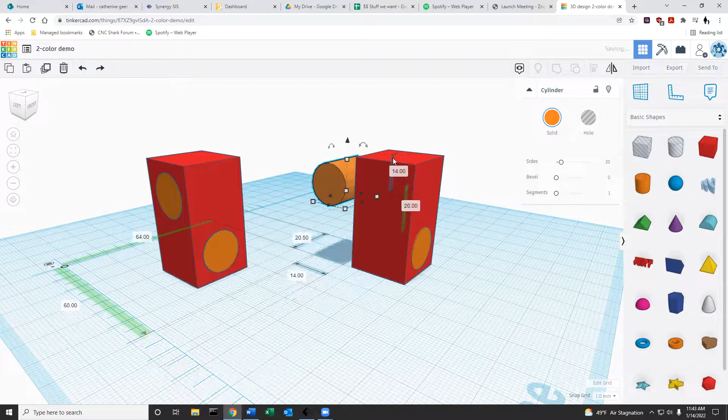So if I look at this shape here on the right, and I grab one of these orange cylinders and move it aside, we can see that this red block, in fact, is solid. And so when I put them back together, really all you're seeing is a little bit of orange, tiny amount that's sticking outside of the block. So right now, there's two solids overlapping. That doesn't really work in the real world, right?

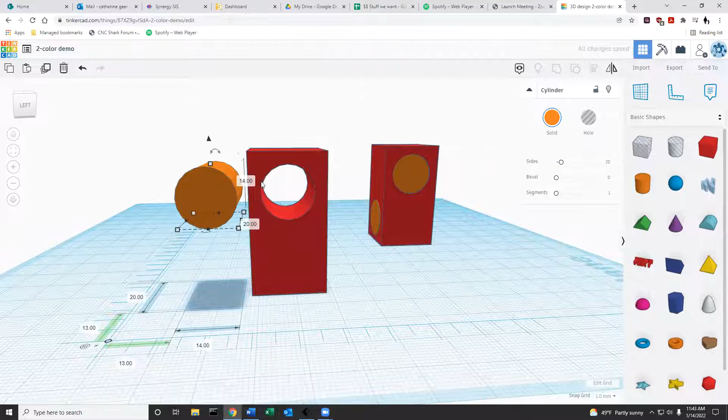On the other hand, this one on the left, if I take this orange cylinder and move it aside, you can see that in fact, it's just sitting exactly inside the hole in the red block. So if I were to envision this in the real world, it would be more like these cylinders are put into these holes in the red block, right? They're filling in spaces that are otherwise empty, whereas this one, we have overlapping solids.

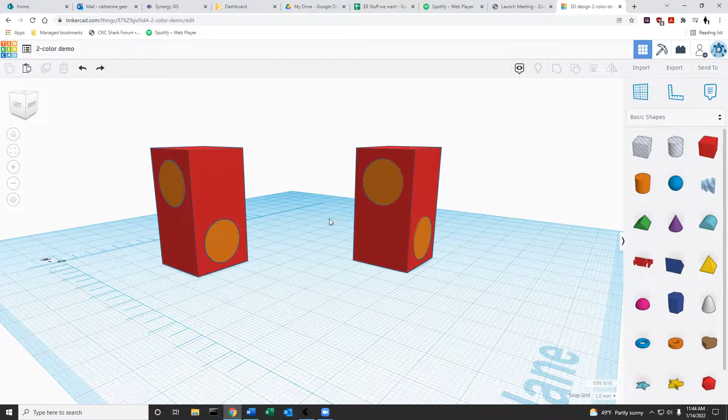So this is important because this one on the left, your 3D printer will know what to do with. This one on the right, how do you put a solid inside a solid? That's not really going to work out. So we're going to focus on this one on the left.

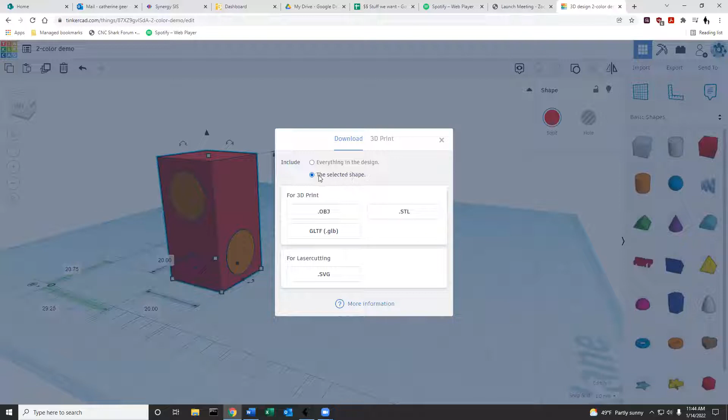And so here's what we do. I have them color coded already. So maybe I will have the red block first. And you can see that I only chose the red block, not the orange cylinders, right? So just the red block. Now I go to export. And you see this option, it says, I only want to export the selected shape. So instead of the whole design, I'm going to take just the selected shape, and then I'll choose STL, and it will do a download.

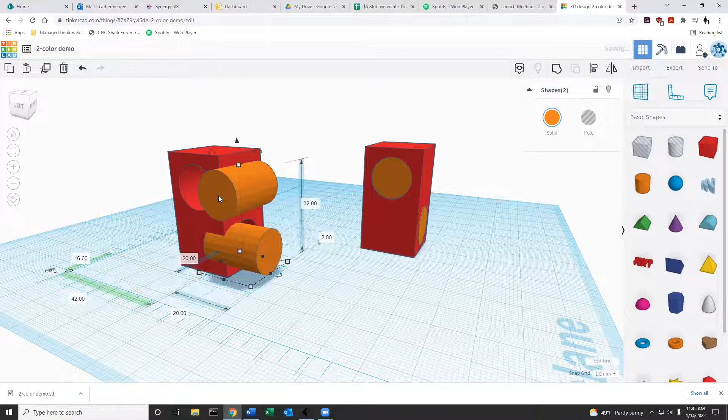Okay, so there's one. And then for the second, I'm going to choose this cylinder, hold down Shift, and choose this cylinder. And so now if I move them around, you can see I have those two together. And now when I hit export, it says I can either take everything in the design or only the selected two shapes. Well, I only want those two shapes. So now I'm going to click STL and we'll get another download.

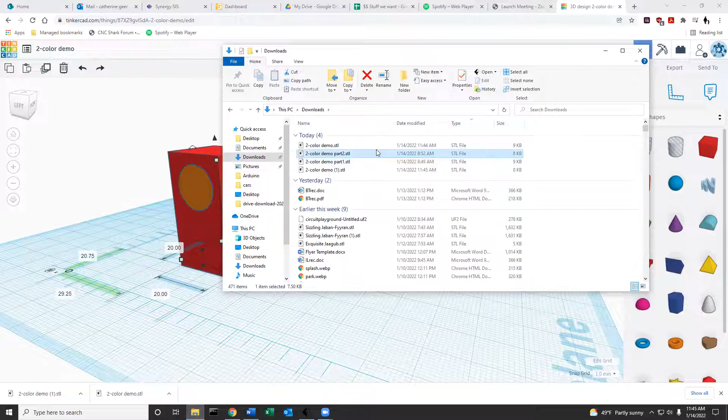So I did this earlier and renamed them so they'll be easier to see, but here they are in my downloads. So two color demo part 1, two color demo part 2. So those are my two different pieces. Okay. So now I'm going to go to FlashPrint. So this is our software for getting our prints ready. I've already set it up for the Creator Pro #1 by choosing the machine down here in the corner. So if you have something else, you could choose a different machine.

And now one important thing for two color printing is we need to go to File and Preferences. And here where it says auto layout newly imported model, I want to say no. By default, this will be on yes. And what that does is it will drop the object onto the platform and try and line it up with whatever else is there, or lay it out so that they can print separately.

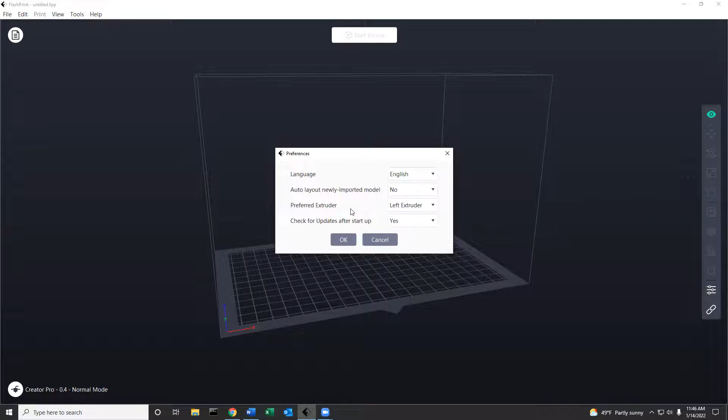And while a lot of times that's really handy, we want to kind of overlap our shapes and make them fit inside one another. So we do not want them to auto layout. I'm going to say okay. And now I'm going to go to the model section up here and bring in new models. So I'll bring in part 1 first and say open. And so here's part 1.

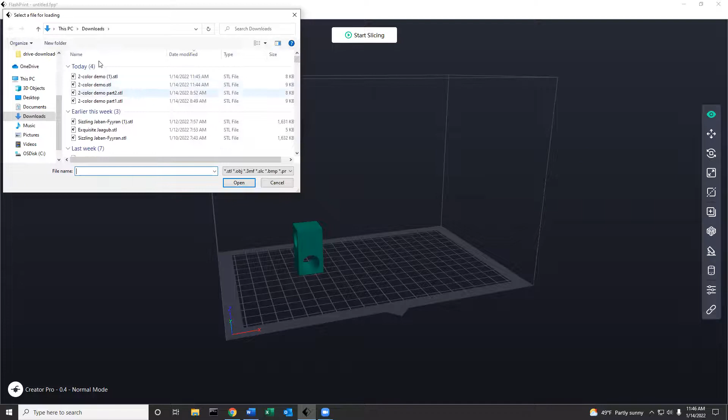And I could, for example, center that. Well, maybe not yet. And now I'm going to bring in the other one. Here's part 2. And I'm going to say open. And so it's going to give us this warning: the model is off the platform, do you want to put it on the platform? So if I said yes, it would drop to the platform and no longer be aligned with my shape. Okay, so I'm going to say no.

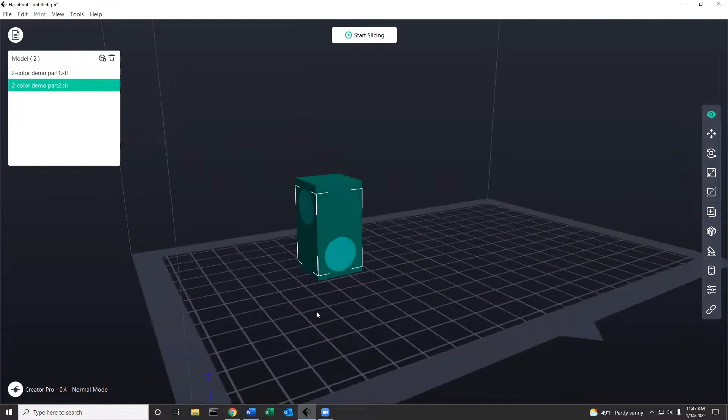And we can see now that it brought in my two models, which are separate, but one right on top of the other, so they fit together now. So if I click off, you can't even see that there's two models there because they fit together perfectly. Okay. So now I need to assign them to the two different print heads. Whatever colors you have assigned to one side or the other, that's how you're going to decide which one to click on.

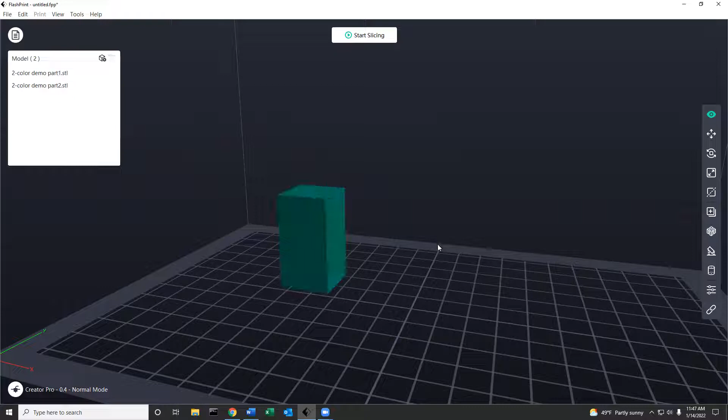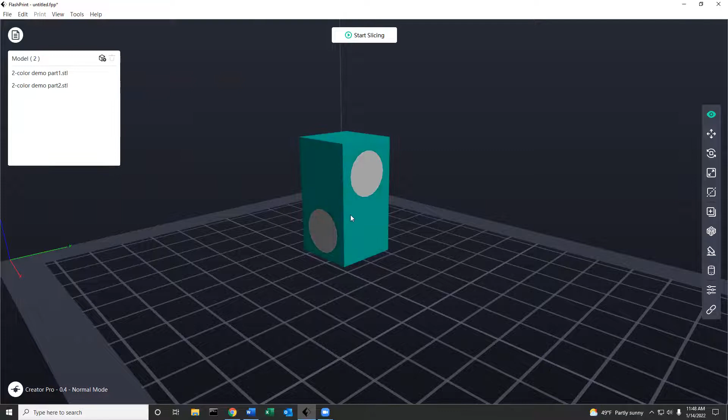So I'm going to click on this one. Now I'm going to right click on my mouse and I will assign that one to the left extruder. That's where it already was. And now I'll click on the other model, right click and I'll assign that one to the right extruder. And so now, as I create this print file, it knows that I want the block everywhere you see green to be on one print head, and these cylinders everywhere you see that kind of gray color to be on the other print head.

This model doesn't need any support, so I'm going to skip that part and click Start Slicing. And I'll just do it on basic right now. So standard is fine. Auto match, I don't even have any supports, so that's fine. I'm going to go ahead and hit slice. Models are off the platform. Yes, I know they're off the platform. Thank you for reminding me, software, but yes, I do. In fact, it's on purpose.

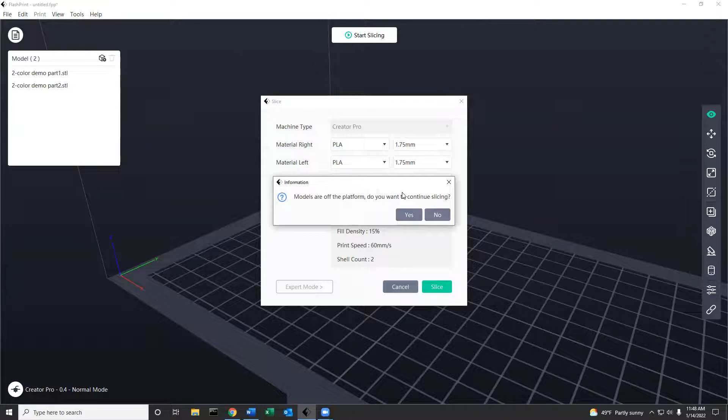So add a wall or not. This is where I'm going to show you what it looks like. I recommend yes when you're doing 2-color printing, yes to a wall. It will use up more filament, and you'll see in the slicing software what it looks like, but it actually prints a physical wall around the whole object. But the reason is to make the color switching not kind of drip one color into the next. It basically wipes off the print head and makes it look a lot better. So I would say yes.

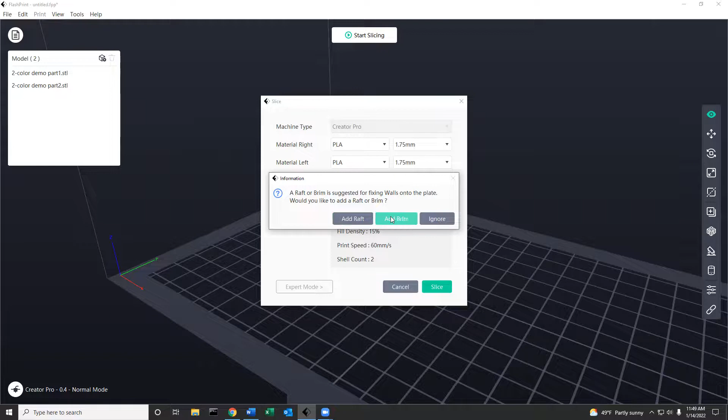A raft or brim is often suggested. Sometimes I do it without, but I actually think it's a good job. So a raft, if you have a curved bottom object. I have a nice flat bottomed object, so I'm going to add a brim. So it's doing the slicing.

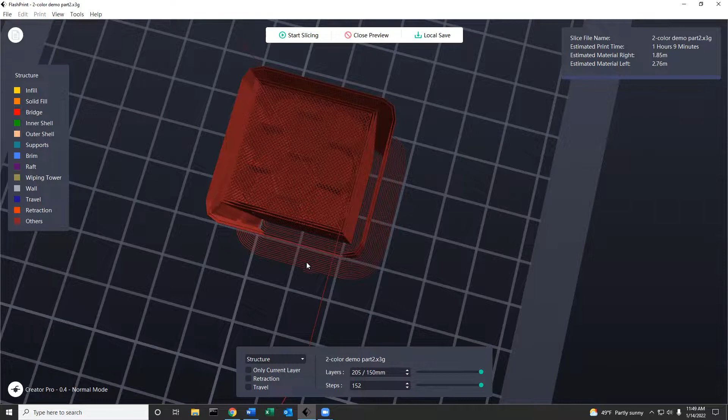Okay, and then I should be able to hit preview, and you can see this wall around the outside that it created. It'll actually be a 2-color wall because it'll do one in one color and one in the other color. And then this down at the bottom, that's the brim, so the wall has something to stick to.

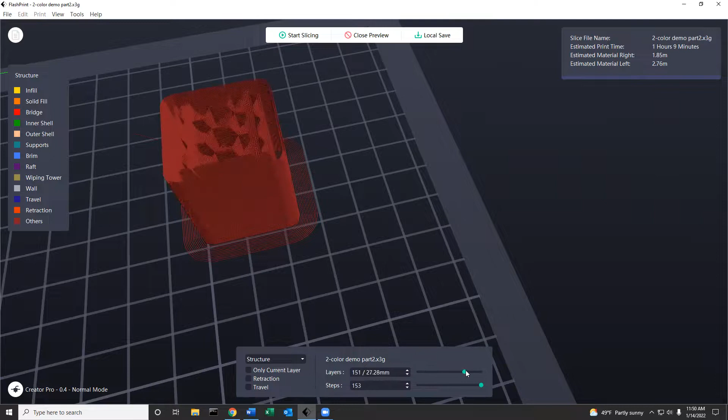And then as we go down, you can see that it has kind of 2 different sets of shapes in there, right? So there's the cylinder that exists inside the block. So that's going to be the one that's in the other color. There you go. And I could just save this and take it over and print. The taking it over and printing part is exactly the same. So I'm actually going to do the exact same models.

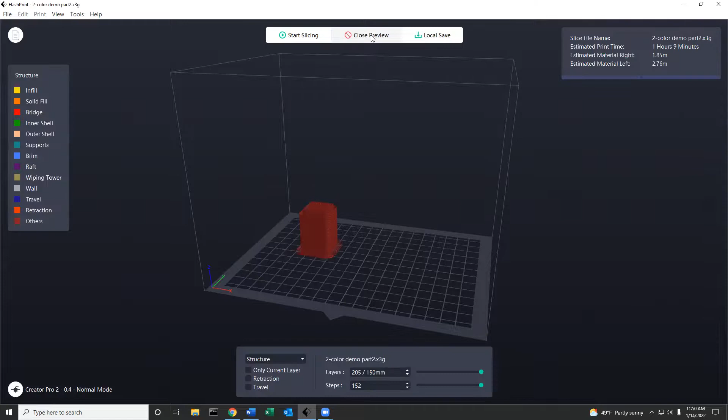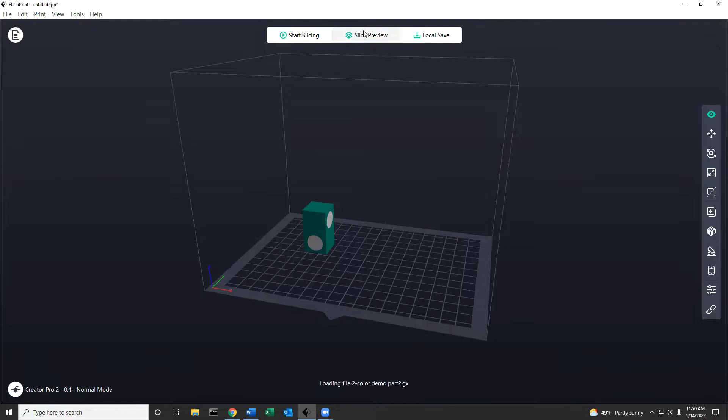I'm going to switch the machine type here real quick, just because the visualizer for the Creator Pro 2 is a little nicer and might give you a good idea of what this would look like as it happens. Okay, so here is our slicer. We can see a little bit better kind of what's happening. You can see the walls changing color right there. See that?

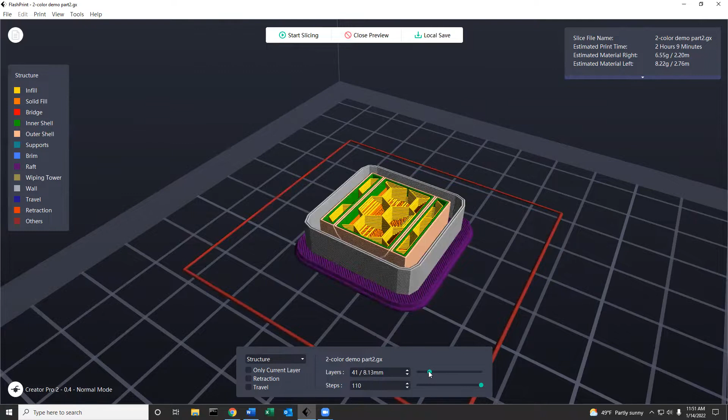As it goes up, you have kind of one print head is doing this outside part and the other print head is doing this inside part. I just like the visualizer on the Pro 2 a little bit better. There you go. Okay, but that's what it's going to look like in both cases. So when you are all done, you'll have this box in one color and these embedded cylinders in another. That's all there is to it. Enjoy.